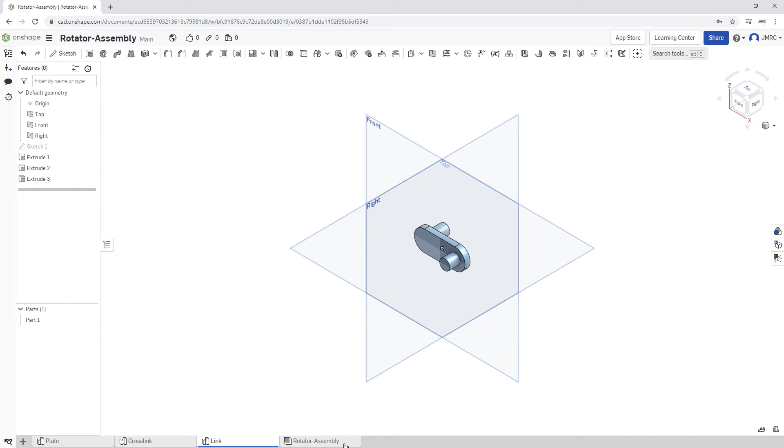Let's inspect the 2D challenge and notice once more, all of the parts are connected to our plate, the plate being our parent part. Let's insert the plate part. Let's head up to our assembly toolbar and select Insert.

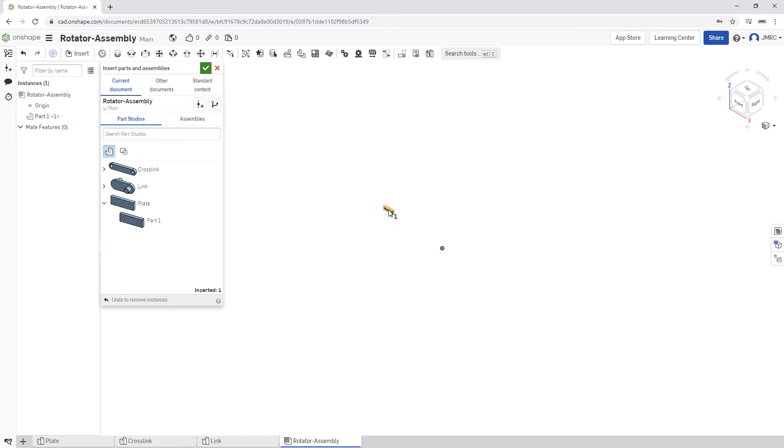Next, let's twirl this down, and I'm going to left click on part 1 and head over to our graphics area. So notice part 1 or plate is currently attached to my cursor. If I left click, this is where Onshape will place our part. In addition, one of the best practices is to align our XYZ 000 with the origin point of our part as much as possible.

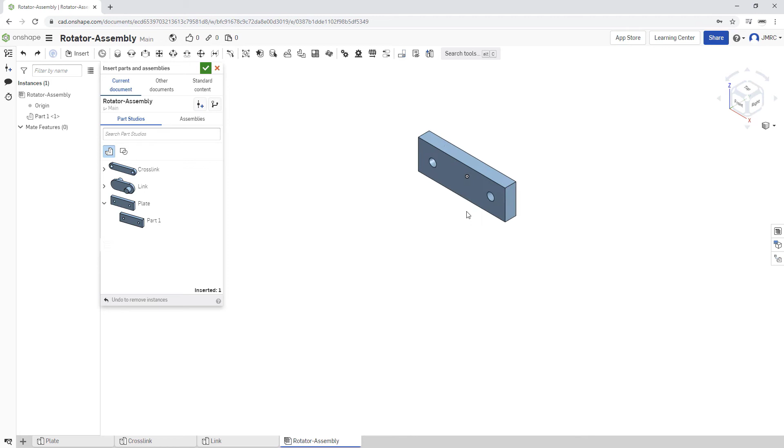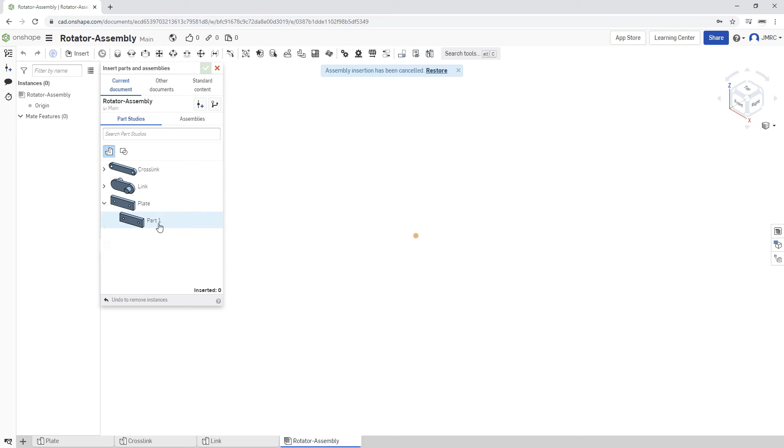So I'm going to hit undo, and notice the origin of our plate is coincident with the origin of our assembly. Let's reinforce this learning. I'm going to undo this operation. Head back once more to Insert, twirl this down, and simply left click on part 1. And while still being inside the Insert Parts and Assemblies window, I'm going to hit the green check mark.

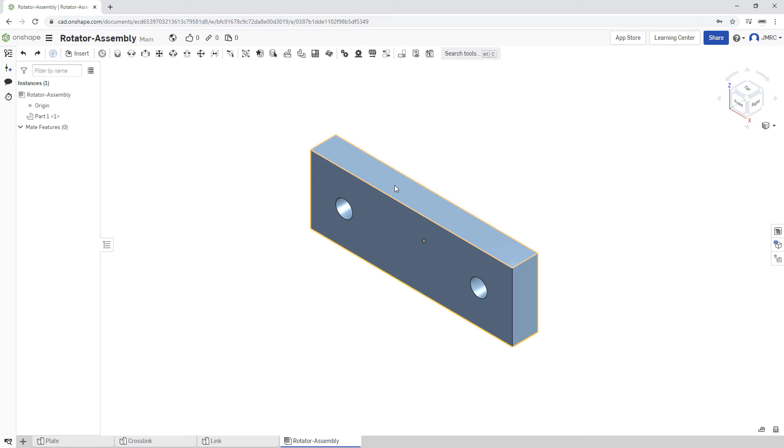We haven't added any mates yet, so this part is free to move. So let me left click and hold to move this part for you to see. Hitting undo. And once more, with the part's origin and our assembly's origin coincident with each other, I'm going to head over to part 1, right click, and I'm going to select Fix.

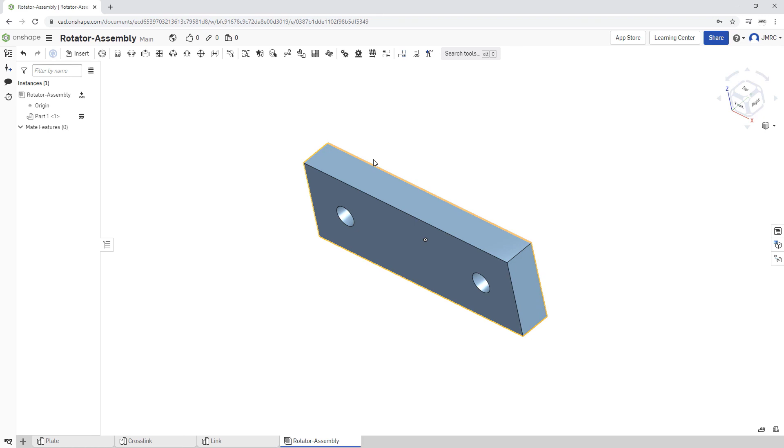And by fixing part 1, we are locking all of its degrees of freedom. So I cannot move this part any longer. In the next video, we are going to add the rest of the parts to make this a dynamic assembly.